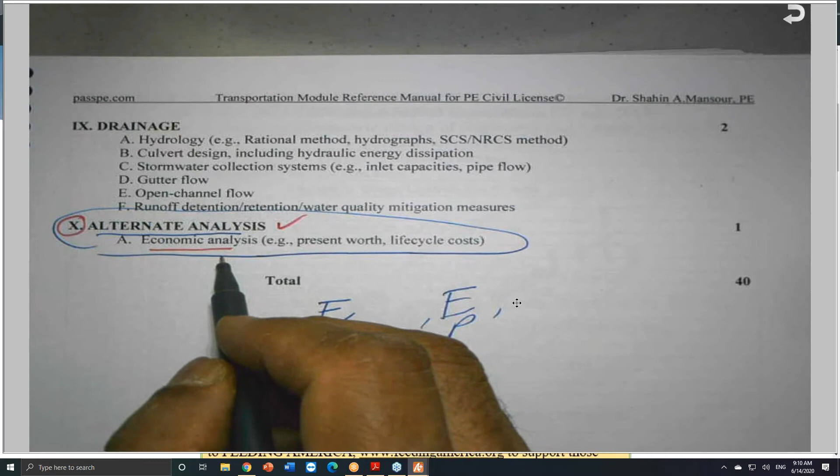One topic for the transportation PM that you will get on the actual exam is something related to alternative analysis. This is the last chapter of my textbook, which is in agreement with NCEES. The NCEES has 10 chapters for the transportation PM, and they put alternative analysis - let me double check, because sometimes I forget stuff. Yeah, alternative analysis, this is the last chapter, chapter 10, which they describe as the economic analysis, present worth, life cycle cost analysis, and so on. They give us some examples of alternative analysis.

This is basically chapter 10 of the NCEES, and it is also the same chapter number in my book.

I was looking for something, and I don't know if I sent this to you or not, but I will send it again. I found a bunch of problems - handwritten solutions like this. These are 20 problems.

I believe these come with solutions, and maybe in the future somebody will type it up for me if my staff comes back after this pandemic. I don't know - my staff is still working from home, but they are doing their best. So I will scan it.

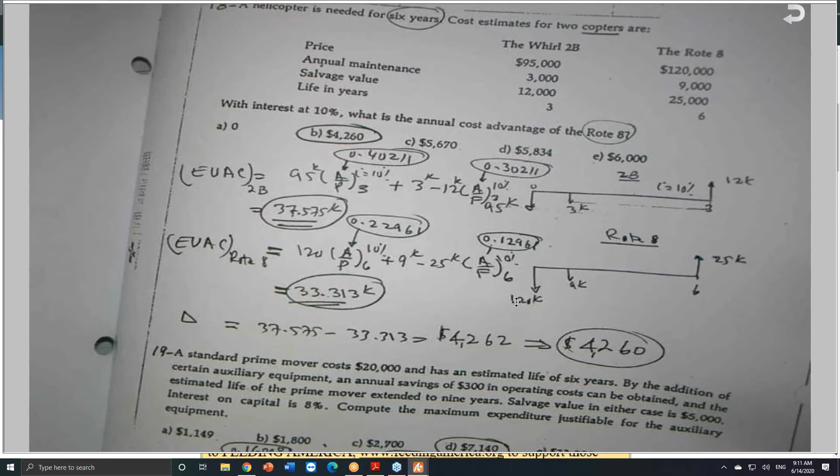I will send it to you also today with my notes. I believe that if you are able to finish all 20 problems and understand them very well, you will not have any problem, because one problem really could be the matter of passing versus not passing. So don't say 'it's just only one problem' - yes, it can matter, especially if it's a straightforward, easy problem. Why should I miss a problem that I can guarantee?

Because there are some problems you will see on the exam, especially in the afternoon, that are difficult, and you won't necessarily be able to finish all 40 problems in the afternoon and get all of them correct. But we should shoot for that. The problems that we can guarantee for sure, we will make our first priority.

You should make it the first priority as part of your strategy when you go to the exam. I always say that you should go with a well-known strategy - try to solve the easy problems first.

So I will scan this and send it to you, and I'll probably go over some of these problems today. I know you don't have it, or if I sent it before, probably you have it. If you have it, that's good - for those attending for the first time, every week I have new engineers attending, because I made this free during summer to keep everybody busy. So I will do my best.

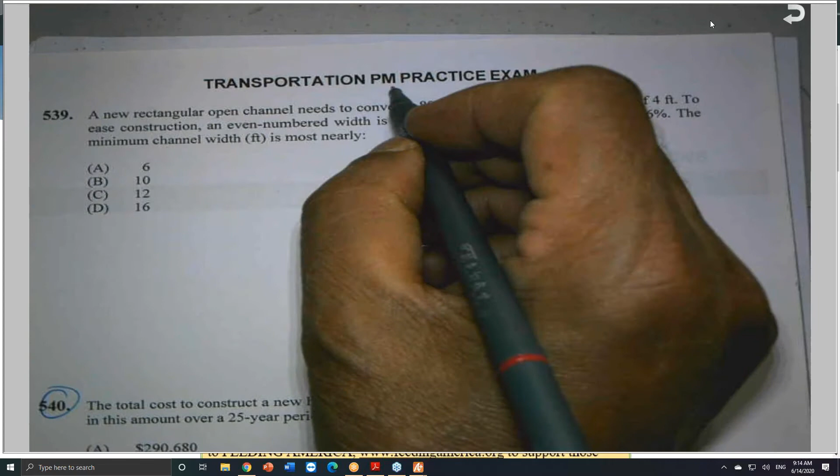This is from the Transportation PM, the blue book. If you have the blue book with you, that's fine, but always challenge yourself. If you look to this problem here, this is chapter 9, drainage, chapter 9 of the NCEES, which is also my book, drainage and pavement.

So they are saying that a new rectangular open channel needs to convey 1800 CFS without exceeding a depth of 4 feet to ease construction. An even numbered width is desired. Assume N is given, S is given, and the minimum channel width is most nearly. And this is what's asking for.

The moment I see lowercase n in the problem, I say, oh, this is Manning, okay, coefficient, or Manning constant coefficient. Immediately, because there are many equations in hydraulics and hydrology, the moment I see N in the problem, that means that is directing me to the proper equation.

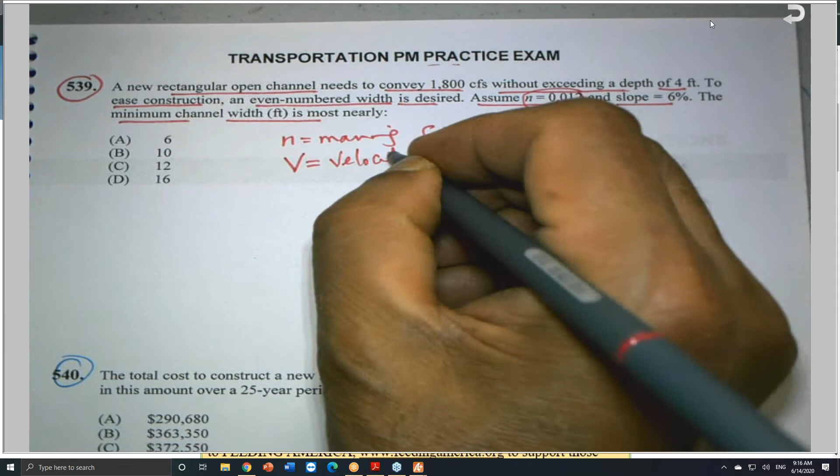And Manning equation, it says V for velocity, by the way, not volume, velocity, is given by 1.486 divided by N, hydraulic radius to the 2/3, square root of S. How do I remember this equation? Probably I solve a bunch of problems, and I still remember the equation by practicing.

And this is the same thing with you. Yes, I know you have textbooks with you during the exam, and I know you have many of them, but we don't like to spend too much time on something that I can handle with ease, especially the easy problems and the straightforward problems. Let me put it that way.

So, for example, I'm double checking to see if I really did write this equation right or wrong, and probably you will say, oh yeah, you remember that. So it is 1.486 over n, RH to the 2/3, square root of s. Bingo. And we know Q is equal to V times A. I should remember all this.

So S is given, which is the slope, and the Q is given. How many CFS? And the depth is limited to 4 feet. And he told me this is a rectangular channel. So I will have a rectangular channel like this.

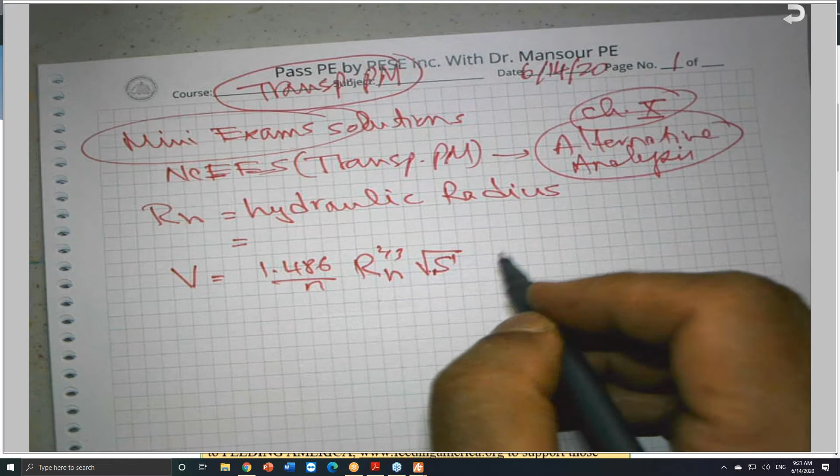What are the units for hydraulic radius before I proceed, by the way? Units are very important, especially for empirical formulas, because this equation Professor Manning came up with, 1.486 over N, RH to the 2/3, square root of S, is called an empirical formula. Empirical formula means an equation that has been developed by these professors, like Manning, or other scientists, after they did a lot of research, testing and formulation, and they came up with an equation that fits. It's not mathematical formulation, not a second order linear differential equation, for example. I can derive a second order linear differential equation for you, or whatever the equation is. So it's not an empirical formula in that sense.

And there are a lot of formulas, and I will mention one after I finish this. I talked about it yesterday, and I double checked it because I wrote it and I had doubts. So I went home and I checked it, and I found that. So the hydraulic radius is a parameter of this equation. It has units.

It is either feet or meter, centimeter or inches. We need to be familiar also with the SI because the exam is given in the US and the SI, so the two.

So by definition, the hydraulic radius is what? All of you remember that, I'm sure. It is the cross-sectional area of the flow, so it is the flow cross-sectional area divided by the wetted perimeter.

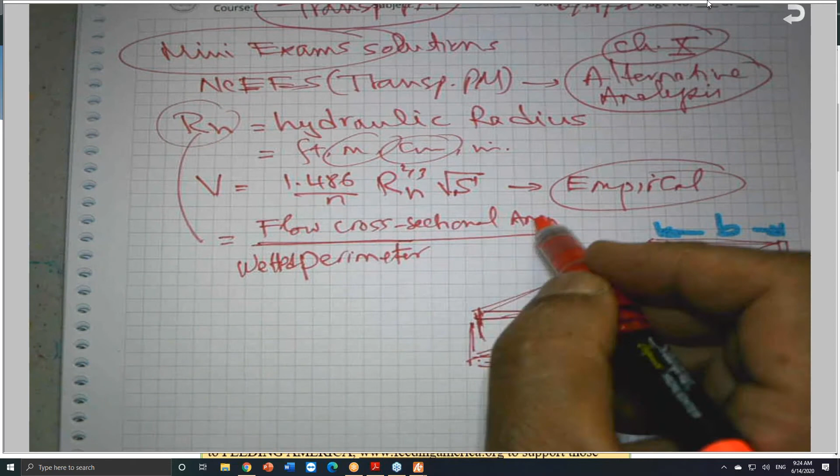So theoretically speaking, based on this definition, the cross-sectional area is very easy, which is B times 4, as we put it here in the equation. But what is the wetted perimeter? The wetted perimeter is this one here: this, plus this, plus this. The contact surface between the flow and the channel.

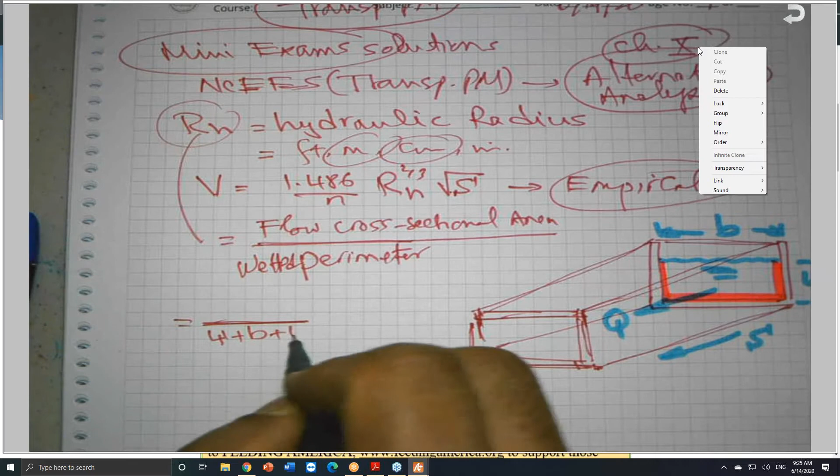So right now, the wetted perimeter is basically 4 feet plus B plus another 4 feet. So 4 feet plus B, which is unknown, plus 4 feet. And the cross-sectional area of the flow, not the cross-sectional area of the pipe or the channel—be careful, this is the flow cross-sectional area.

So in this case, it is B times 4. So this is 4B over 8 plus B, and this is the RH.

So if I plug it into the equation right now, let me write it here since I'm going to scan this and send it to you today. So the Q, which is given to be 1800 CFS, is equal to 1.486 divided by N, which is given to be 0.012, times RH raised to the 2/3, so it is 4B over 8 plus B, raised to the 2/3, times the square root of S.

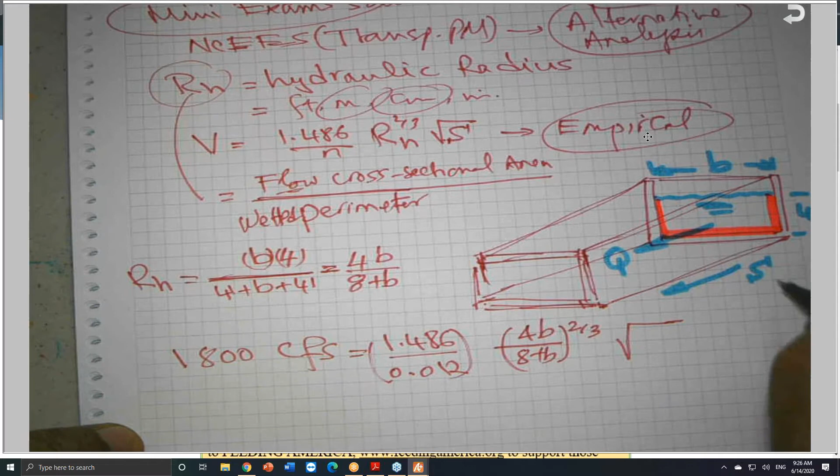S is given to be what? The S is given to be 6%, by the way. S is given—sometimes they give you S as a percentage, or the drop, how many feet per linear foot based on elevation. So this 6 is written like this, sometimes they give it to you like this. This means the same thing. So it gives the percentage, or in this case it's 0.06, it should be written this way, which is 6 over 100.

And finally multiplied by the area. So all this, by the way, from here to here, so far this is the V, but I need also multiplied by the area, the cross-sectional area of the flow again, which is 4 times B.

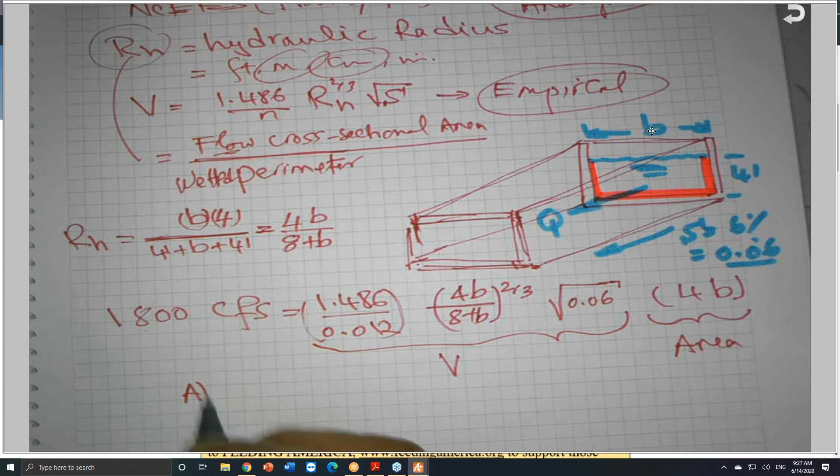So here you will find that B is here and B is here and B is here, and here it is. So, and you are given 4 answers, A, B, C, and D.

So in this case, I can simplify a lot of things here. I can do this and the square root of this, but I have B in the numerator, B here in the denominator, and B multiplied here. I can get the B here, by the way, or in a situation like this it's much easier. You can mathematically solve it, but I need to remember what is known as back substitution.

Since already I have 4 answers, instead of dealing with the exponents and all these things, I can say try—normally, but whatever you prefer to start with. Normally, I start either with B or C. You can start with C, and if you need to go smaller or larger. If you start with B, you need to decide to go smaller or larger. Again, whatever—instead of dealing with a lot of exponents and all these things.

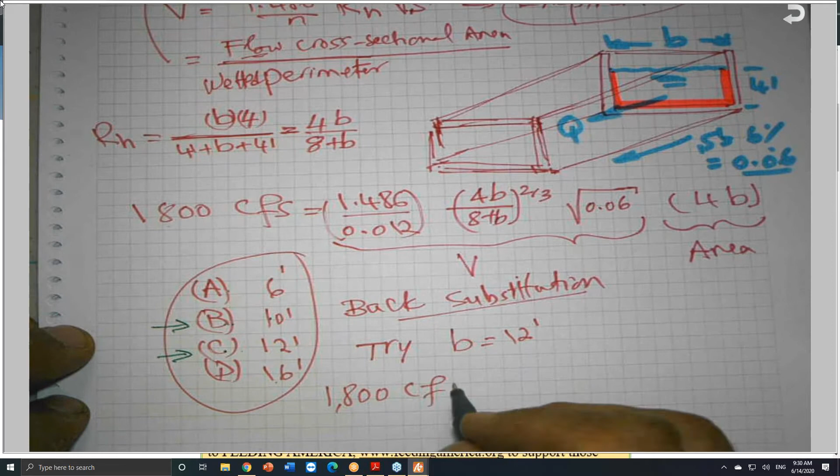Theoretically speaking, this is supposed to be this side here. So if you plug B equal to 12, 12 and 12, you will get a number.

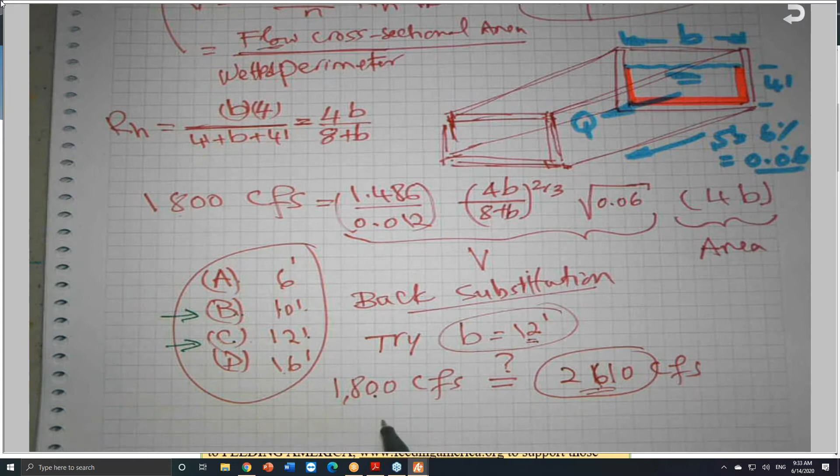This is my calculation, I hope you agree with me. That means the 12 I selected is not the correct one, because this number is greater than this. So I will say, try B equal 10. If I have time, I will do it, and the calculation to get an answer to this question. Is it 1800 CFS? Is it really close to this number, whatever it is? Because I tried 12, and 12 is too wide, it gives a larger Q than what is required.

So in this case, if I have time, I will try 10. If I don't have time, and I already tried 12, and 12 is too big but the difference is not huge, I believe 10 should work immediately. But for the sake of discussion, since we have time, as I told you, if you have time, do it. If you don't have time and you tried one number, the second number should work easily.

So in this case, let's go to this number here, I will try 10 right now. 18 enter, inverse, 4 times, 10 times, 4 times, 10 times, recall this number, multiply one more time. 18 enter, inverse, 4 times, 10 times. Probably most of you are faster than me because you are younger than me, so you're supposed to be faster. 2084 point something.

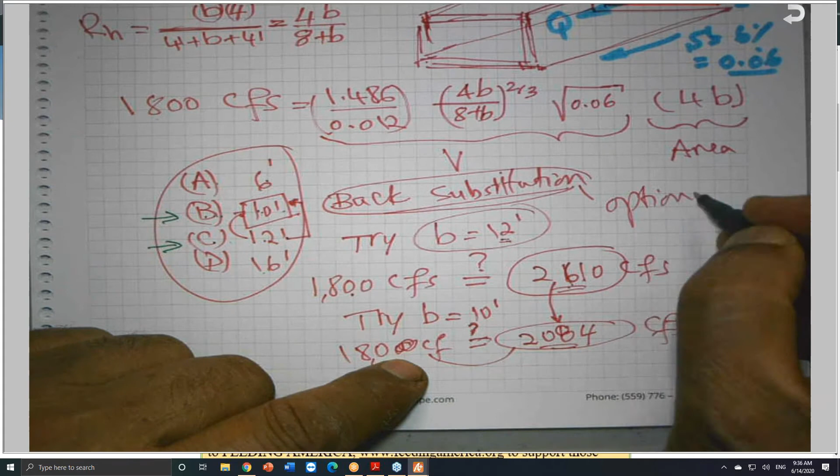If you started with B, this is one way, back substitution. I prefer you can make the equation, move this to the other side, and put a table. I have the table given in my book, the same thing. It doesn't matter which methodology you use, as long as we understand what we're looking for. But I consider back substitution is one of the options you should consider when solving for unknowns with exponents, like in our case here.

So this is something I needed to be aware of, and when you receive it, solve it again, and if you agree with me - I don't know the answer given in the NCEES, you can look at it - but I believe that 10 should be okay. The correct answer, which is 10 feet, is going to be the width that provides the minimum.

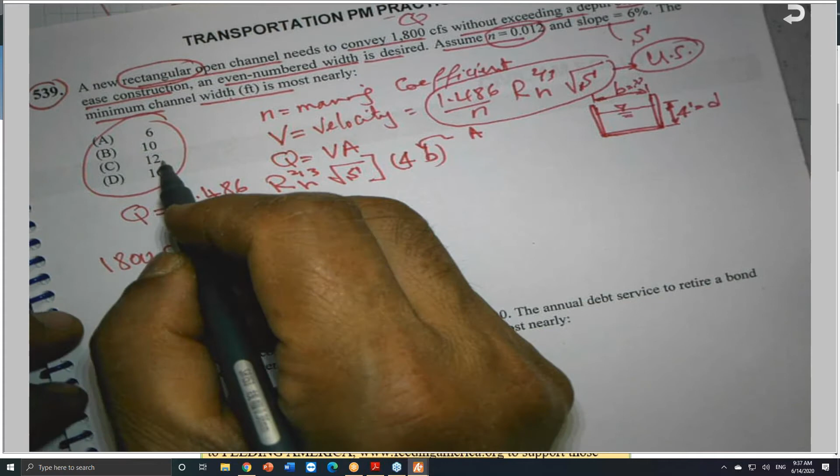By the way, do you think that 12 will work? Yes, 12 will work, 12 will carry more flow, by the way, and even the depth of flow will be less than 4 feet. But there is one key word here - so 12 will work, the one I started with, but he said the minimum.

The minimum. Be careful about that, by the way. Those are keywords on the exam: minimum, maximum, recommended.

So this is the way I will handle such a problem. If you have a better approach, please let me know and I will be glad to discuss it.

But there are some equations you need to know, related to Manning's formula. If you put the two equations side by side, this is the US and this is SI. The exam, to the best of my knowledge, can be given based on the NCEES, either in SI or US units.

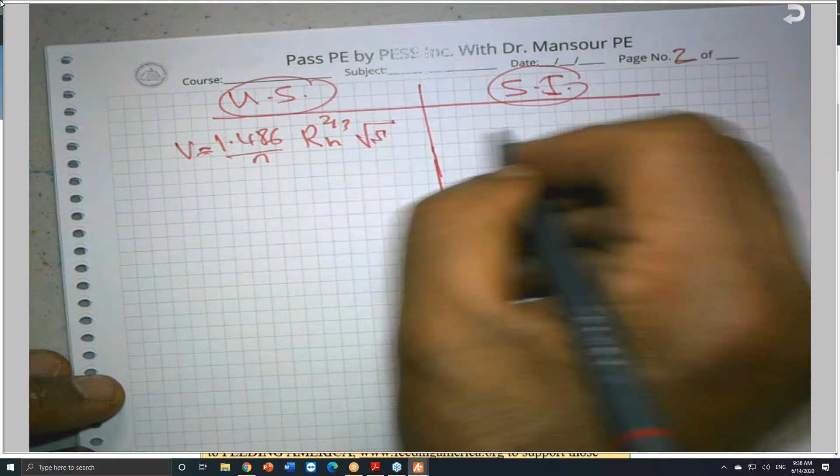V equals 1.486 over N, times the hydraulic radius RH to the 2/3 power, times the square root of S. The SI equation is V equals 1 over N, times RH to the 2/3, times the square root of S. The coefficient is different if we use SI. And again, Q equals V times A, the same equation, and we can proceed to solve the problem in SI units.

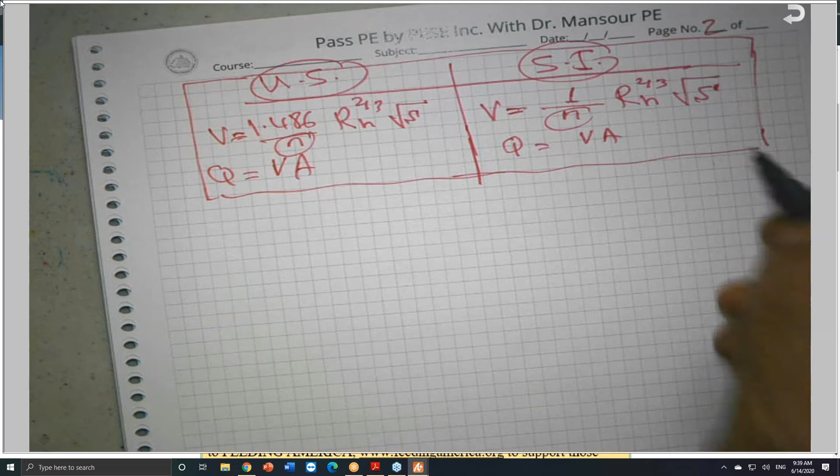These equations are empirical formulas. For the Manning's formula N value, normally they give it to you in the exam, because there are many tables available in the hydraulics books, and in order to avoid any variation of these constants, they give you the value of N to eliminate any discrepancy. So thank you very much.

Yes, some of you already solved it. Thank you very much. I don't know how the NCEES handles it - you look at it, maybe they set it up as an equation and solve the problem that way.

But I will write the equation and stop here, and use the test technique - solve it both ways. If you have other approaches from the NCEES or other books, let's look at what works. I consider back substitution one of the options I recommend you consider seriously on the exam, because it is much easier from my point of view. But again, you are the one who makes this determination - if you prefer a certain method versus another, you are very welcome to use what is appropriate for you, because our ultimate goal is to pass the exam.

What method do you prefer - empirical formulas? The professor Manning came up with this equation.

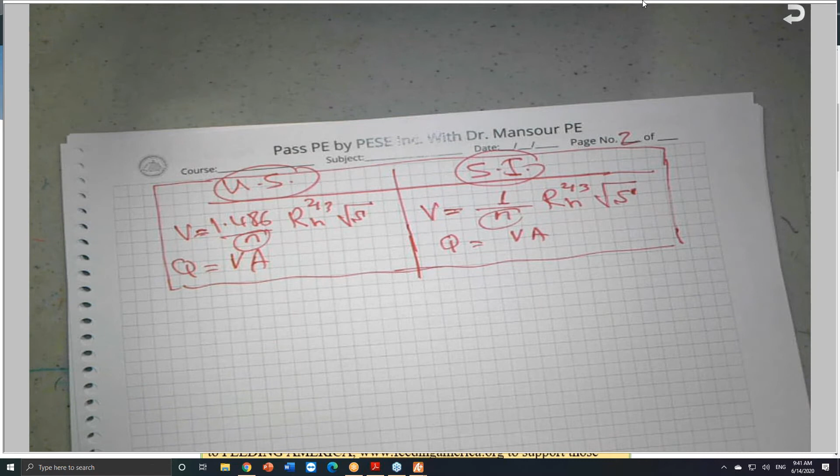Let me write it down - keywords, like minimum, maximum, recommended, preferred. All these keywords - I will pay attention to any of these that might be included in the question itself.

One empirical formula I was talking about yesterday in the afternoon - that's correct - it was about the two-thirds, that we were solving a problem.

We do have the bank cubic yard, the loose cubic yard, and the compacted cubic yard, and this diagram or figure - I drew it more than once, and I'm sure you memorize it by heart right now because I drew it about 15 or 20 times. I'm not counting, but...

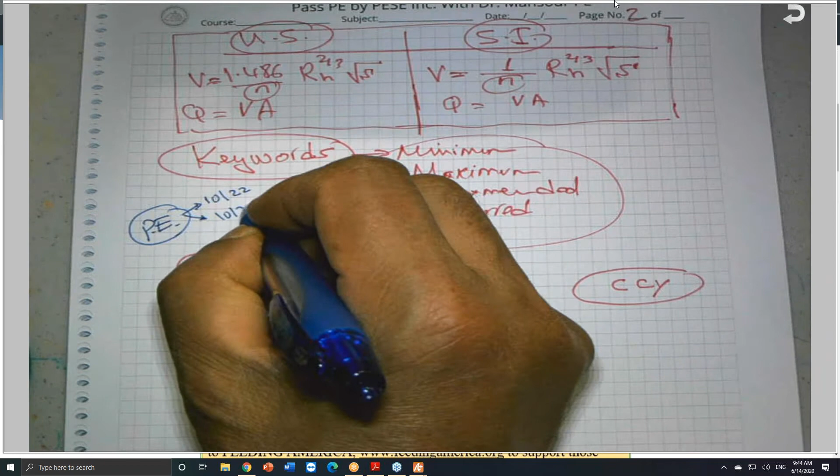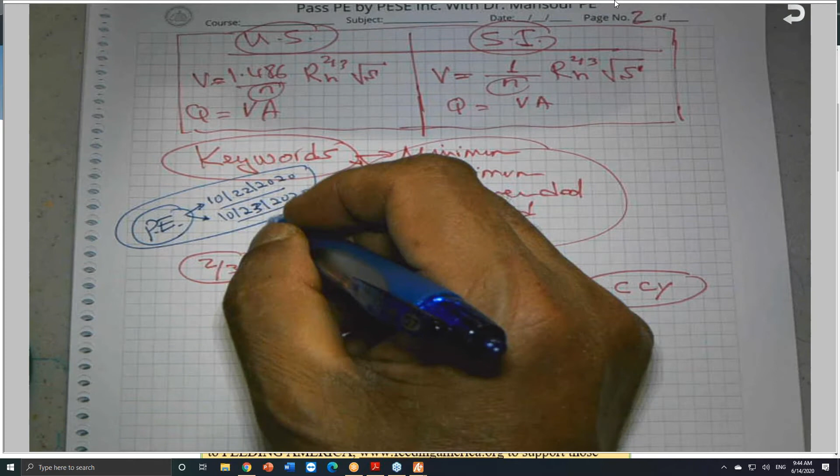What I need from you now, for the October 22 and October 23rd exam, I hope it will be given—no second wave, according to them. I don't know, there is a second wave according to professors or scientists or experts. I don't know what the situation will be on the 22nd and 23rd. I hope the sites will be available and we haven't hit the second wave yet, and everybody is safe to go to the exam site, unless something changes between now and October. But let's hope we make this exam, the national exam, the NCEES, the last one—do it and forget it.

I know some of you were upset because you were ready for the April exam and it was canceled. That's fine, no problem, the sky will not fall on the ground. Just consider it another opportunity to study more and prepare yourself well, so when you go to this exam, that's it—no more. Take it and forget it, and move to the next step. If in California you need seismic and surveying, or if you're in another state you already passed the national exam and have a PE. I wish the best to all of you.

So the two-thirds was mentioned yesterday, and we said that from here to here is the swell percent, swell factor, which equals 1 plus swell percent. As I mentioned before, the swell percent must be given, and the swell factor is greater than 1.

And the second relationship, from here to here, is the shrinkage factor, which is 1 minus shrinkage percent. The shrinkage factor is less than 1 for most soils like silt, clay, sand, and mixtures of these, but it is greater than 1 with rocks—rocks will never shrink after we disturb them by blasting or whatever method.

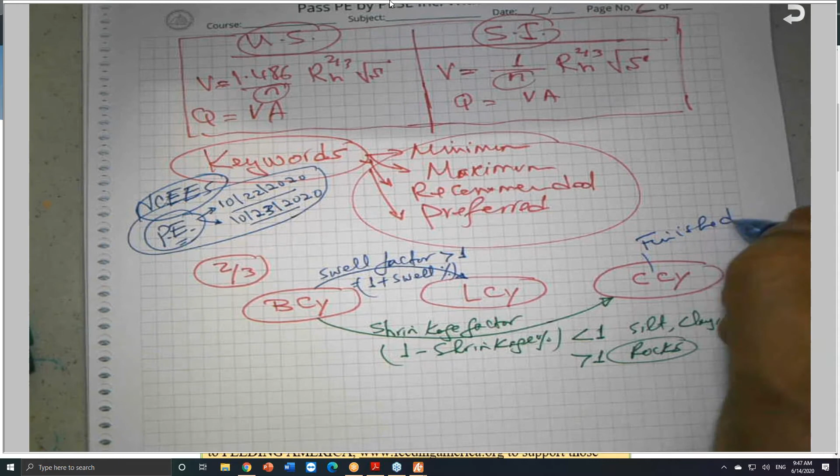So yesterday we were solving a problem. We have the volume here in compacted cubic yards, which, by the way, is a finished product—when you design a facility, either a highway, a street, or even a simple parking area, residential or commercial, and you need some kind of fill. So if this is the OG, the original ground, whatever fill you put here, or embankment as we call it—embankment or fill, both acceptable—this is a compacted cubic yard, a finished product, because as a designer you have a profile grade here. So this volume is the final volume, after they put it in layers and compact it.

So we were talking about the 2/3 yesterday. We got a number here and need to estimate the number here. If we take about 2/3 of this number, it gives us this number, and from this we can get the number of trucks. Those of you who attended yesterday, I believe I covered this in construction, and if I'm not mistaken I sent you my notes yesterday, so you should have it.

So the 2/3, and the second equation or scenario, is the 28-day compressive strength F sub C prime, which is P over A, supposed to be after 28 days. But we test the concrete at 7 days, called S7. So S28 equals S7 plus 2.5 times the square root of S7. This is the equation I wrote yesterday, showing how to estimate the 28-day strength from the 7-day strength. But you have to be careful—these must be in MPa, megapascal, and the result will also come in MPa. And 1 megapascal equals 145 psi.

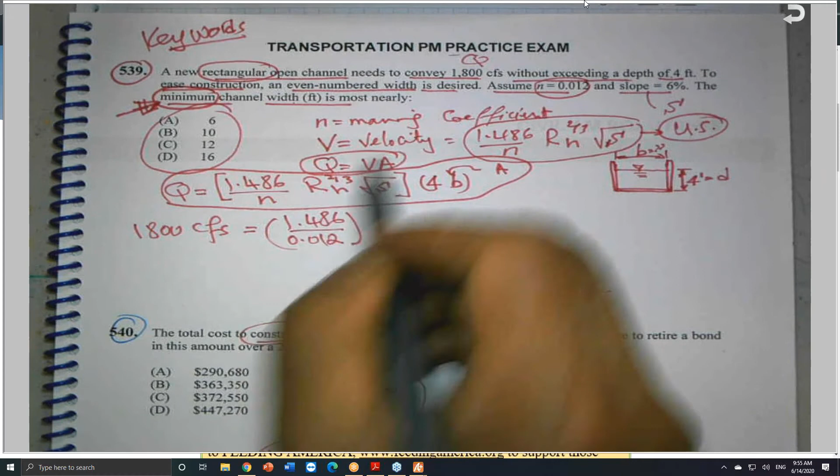Nobody will ask you to memorize equations, but by practicing you will be able to memorize some of these equations. As I told you, Q equals V times A, V equals... the same story here - we have a bunch of equations. They are available in any engineering economics book or any review book or prep book.

And we have the interest tables. So the I and the N are given either in equations or tables - interest tables. And there are books of interest tables. I provided as much as I can, most of the common interest rates with the common compounding period, N, whatever. But we should know what we are looking for.

If we are able to translate this into English, and the translation into English is called a cash flow diagram, CFD - this is the abbreviation of cash flow diagram. If I can translate this into a cash flow diagram, this is going to help me a lot. And I always encourage everybody to draw a cash flow diagram, a sketch, or illustration, or whatever you call it.

Any disbursement or out of your bucket at time 0, we call it present worth, which is P. Anything beyond that is called F, or A. It depends. If I have something annual that will occur every year, we call it A, annual or annuity, or sometimes equivalent uniform annual cost, which is A.

If we have anything available for us at the end, where N is the end of the life of the asset or the end of the compounding periods, anything left could be a future value, F. And F at N could be positive, going into your bucket, or it could be negative, out of your bucket. Normally, this is SN.

What is SN? This is the abbreviation for salvage value, or sometimes called residual value, which is the value of the asset at the end of its life. I bought a car, or a piece of construction equipment, and used it for 5-10 years, and I sold it. The price I get at the end of its life is called salvage value or residual value. It can sometimes be positive, sometimes negative.

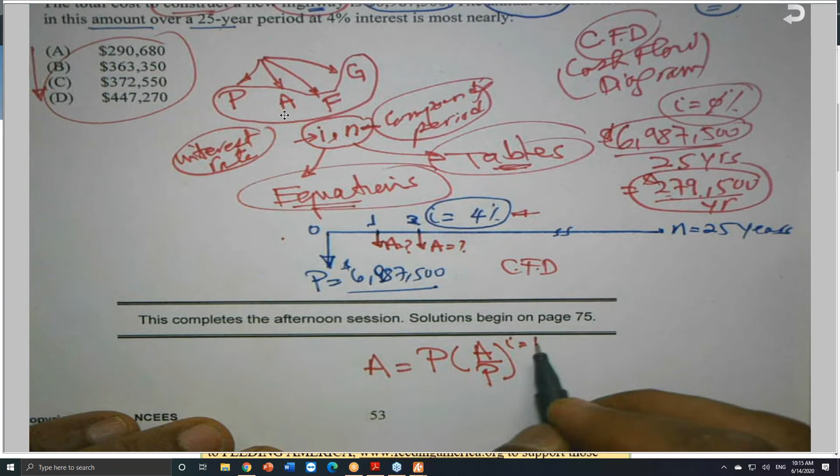So I'm saying that I'm looking for A. So A, which is the annual debt, is equal to P, which is the present amount, times A over P for the interest rate of 4%, and N is equal to 25. This is the setup of the equation.

How do I know it is A over P, not P over A? This is A over P or P over A, because both of them are available in the interest table, as I'm going to show you shortly. Always imagine that you are canceling out. I'm looking for this, so P, A over P - imagine that you are canceling this with this. What is left is A, which is the one I'm looking for. This is the way I double check when you are in a rush during the exam - you may call it P over A and you will get something, and they might have an answer to match that. But normally I look at this as, if I'm not canceling, this is a factor that I'm going to get.

If you don't like to use the interest table factors, in this case, you must have some kind of a table or a chart or a page. It does have the equations, and they are available everywhere, and normally we use these equations. Let me bring it to you. Here it is.

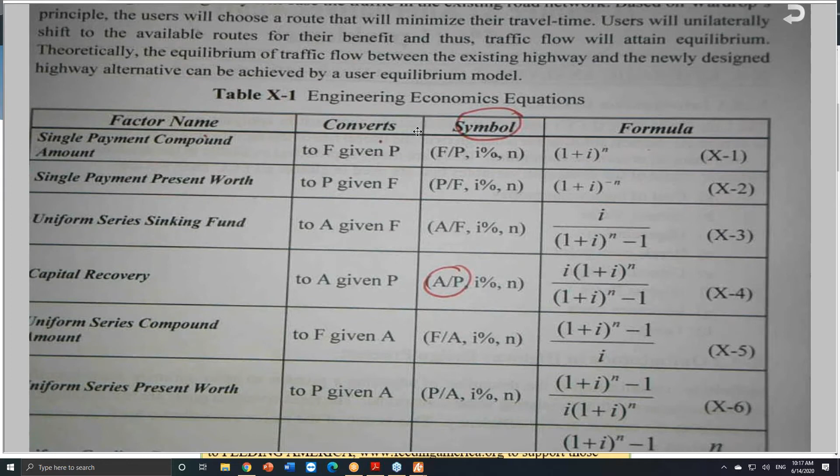This is an example of a table available, and I'm sure that you have it - the name, what it converts, the symbol and the formula. So those are the symbols that we are using. For example, A over P - here it is. A over P. And we have P over A also. This is called the capital recovery factor. P over A is the uniform series present worth factor. A gradient also - all these things are given, so the equations are given.

The equations are given, and also at the same time, the interest tables are available.

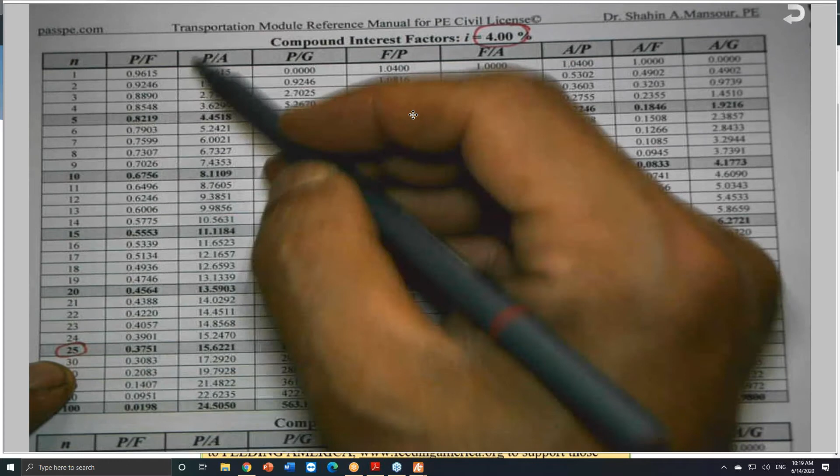So I will go to the capital recovery factor. I will go to the interest table that has 4% - like this table here, for example, I have a series of tables. I put them in this form, rows and columns, may be much easier to use. So I have 4%, and I have N of 25. Here it is, 25. And I'm looking for A over P - this is P over A, but I'm looking for A over P. So I get a factor of 0.0640. So it is the 6,987,500 times the factor that I got from the table, which is 0.0640.

Let me get my camera here close so you can see it. So in this case, if you multiply this times this, hopefully we are getting an answer to match. So I got 447,200. Is this correct? Let me make sure that 6,987,500 - normally I do my calculation twice. I got something okay in this.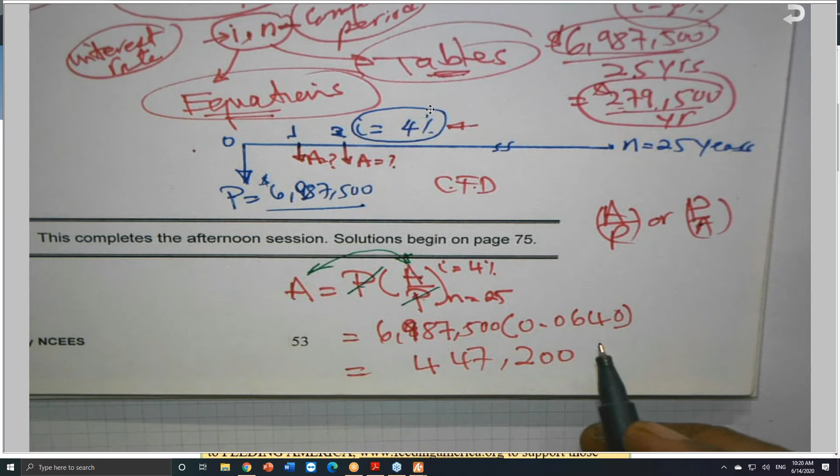It depends how many decimal places you are carrying. This is a factor here. So it is 6,987,500. Enter 0.0640 times, one more time. So this is what I got. So if we have 4 answers, probably the answer D is the closest one.

Which is by far, by the way, if you compare this number D, the answer D, the 447,000, compare - do you remember the interest-free loan that Mr. Mansour will give you? No? Okay, you see the difference between them? This is the interest-free, which is zero interest. You take the debt divided by the number of years versus the interest that compounded annually.

And normally this interest here, by the way, because we have something called I sub E, I doubt that he will ask you effective interest rate. If the interest, they call it I here, there is another I called I sub E, or we call it effective interest rate. Effective interest rate.

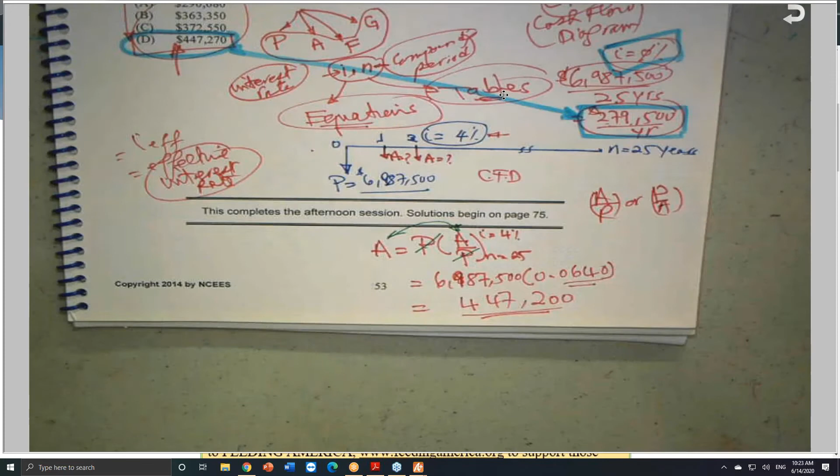When you have n, the compounding period doesn't match any of these values here, and it did happen in the past, by the way. If he gave you an interest rate that whatever book or books you have, for example, I have 4-6% all the way until 20 or 18%, I remember. 18%? Oh yeah, 18%. 18%.

And this is 12, and I jump to 18. Unless if you have one of these books that has interest tables only, and they are available in the market, I don't expect that you need to carry this with you. I do have a series of tables, by the way. Somebody generated them for me 2 years ago, but I didn't get a chance to check it. They have a very wide range of interest rate, and also that number - so if the interest rate is not among the values given in any table that you have, or the n, the number of compounding - here it goes from 1 all the way until 25. And after that, jump to 30, 40, 50, 60, 100.

So if the compounding periods are not matching whatever you have here, in this case, obviously, this linear interpolation - sometimes we do it, and you should master what linear interpolation is, how to use it, and I will be glad to talk about how to do linear interpolation by hand. If you have a programmable calculator and you know how to use linear interpolation, please do it. So the interest tables, most of the time, but I cannot guarantee that all the time the interest tables will be available. So please look to this problem, and if you'd like to solve it using other methods, please use the equations. You need to pick the right equation, and also it's very important to pick up the right equation, because the right equation is very, very important.

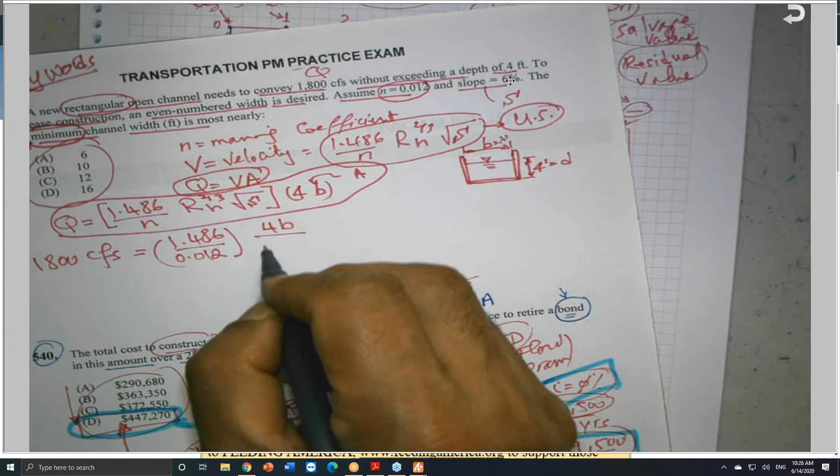But I should finish this problem here. I say that the RH is the area which is 4 times b over 8 plus b, 2/3 at least, you know exactly, and the square root of s is given to be 0.06, and the area is 4b. So this is 4b, b as in boy, here it is. So this is the equation that we are going to try, back substitution and so on.

Okay, so I scan it, and because I wrote something here, probably you need it. In addition to what there were notes.

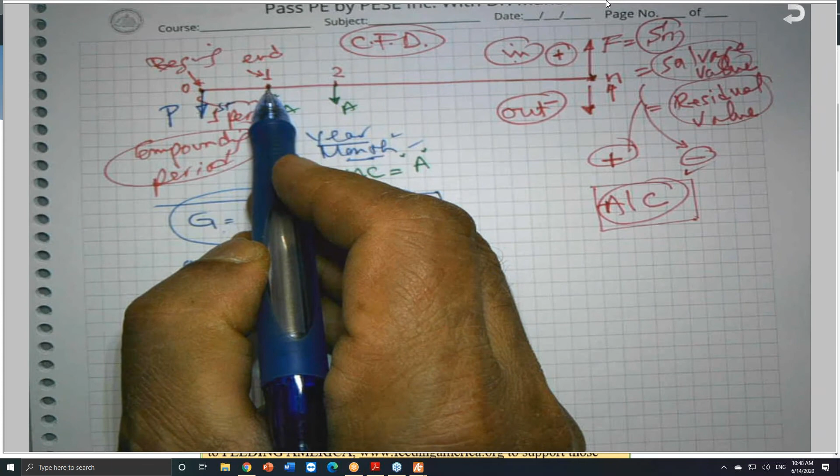We said that the way engineering economics equations and factors are given, and I will go to my notes so you can read it again when you receive it - at 0, at the beginning of the life of any asset or any economics operation, this is the beginning and this is the end. So this is the beginning of the first period. Here it is, one period - this is the first period, period number 1. It could be a month, a year, a day, or whatever it is. This is the beginning and this is the end. Do you agree with me? So any period has a beginning and an end.

For example, if this is 14 and this is 15 - what does it mean? This is the end of period number 14 and the beginning of period 15. Do you agree with me? This is the end of 15 and the beginning of 16, if we have a 16. This is called a period.

Like your PE has a beginning and has an end. You start studying for the PE, I don't know how many months ago, and the end is coming very soon. This October you will ace it, and this is the end of it. So everything has a beginning and has an end, okay?

So going back to the problem, let's translate it into English. $200 is deposited in a savings account at the beginning of each year for 15 years. So this is 0 and this is 1. This is the beginning of the first year, and this is the end of the first year. Where did I put the money? I put the money here.

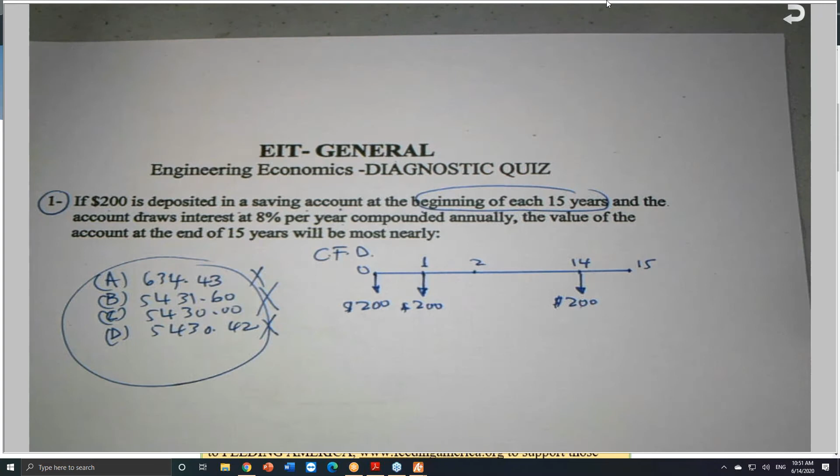If you count how many payments from here, from 0 to 14, you will find there are 15. Because this is at the beginning, here it is a key. As I told you, every problem has a keyword or words. If we miss the keyword, like maximum and minimum, beginning, end - if we miss the keyword, we are going to miss the problem, like this one here.

He's asking, what is the value of the amount at the end? So I need the money here. How much is the value of the money here, at interest rate I equal 8% per year, compounded annually? So I don't do anything to get the I effective. I doubt he will ask you to calculate the effective interest rate.

I do have some problems, the problem that you receive. So in this case, if you count them, how many payments did I make here? They are 15, agree with me or not? And the moment I put my money at the beginning of the first year, this money starts to earn interest, which is at 8%. But I need the money here, so I need the F, the future.

And again, the other keyword here, at the end. So two keywords: at the beginning and at the end. And the interest rate, I equal 8, and N equal 15. Why did I say F over A? Because this is A, and I'm looking for the future of the money to be accumulated.

If I stop here, this will give me the money here. But I need the money here. So I have to multiply this by another factor, which is F over P for 8% for N equal 1. And I know you will disagree with me, and I know that you will take it tonight and do it. It is $200.

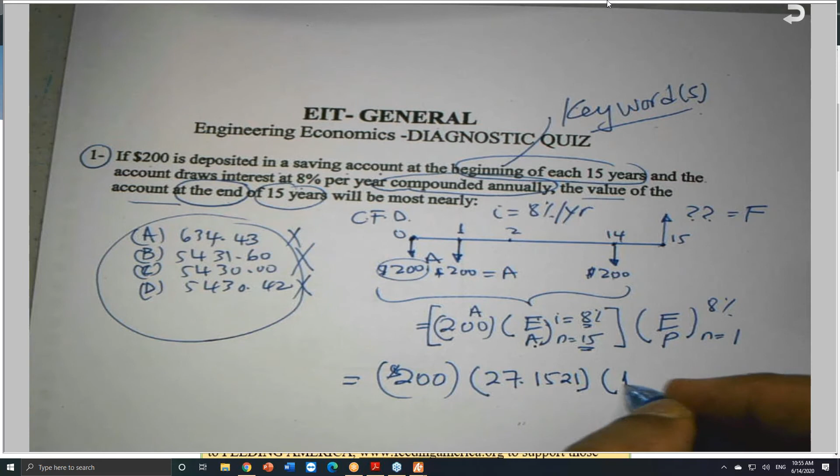If we go to the first factor, how much is this factor here? F over A for N equal 15. Anybody has interest tables, just to correct me if I'm wrong: 27.1521, and I have to multiply this to bring the money to the end of 15 years, which is another factor, 1.08, which is 1 plus I, by the way. If you do this, you will get $5,864.

Let me double check my math very quick. One more time. I did it. It's 200, enter, 27.1521 times 1.08 times... no, it's 64... sorry, 64, okay, 0.85. So it is $5,864.85.

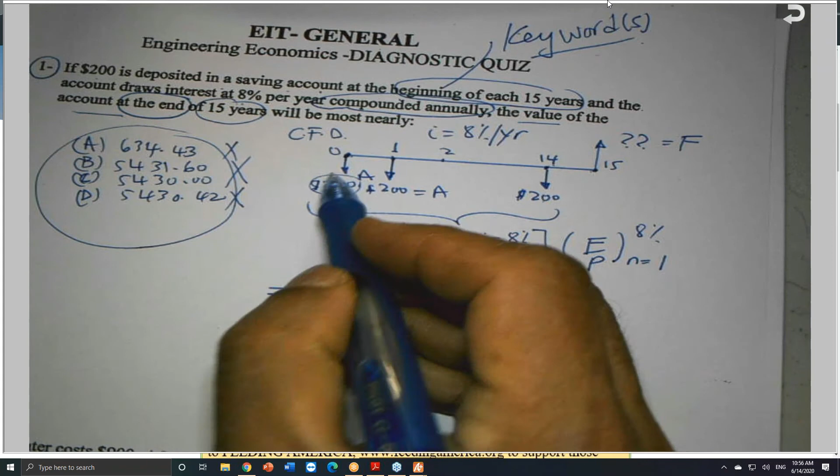I know you will say, oh wait a second - this is what I was referring to. I said that sometimes they can give you the payments to be made at the beginning of the compounding period, like this. I need to deposit the money at time 0, at the beginning of each, not at the end. And don't forget, you need to transfer the money from here to here. Look at it again, and I'm sure that next time when we meet, you will ask me. I used to give this as a quiz when I was teaching back in Las Cruces in New Mexico.

And some students, they stop here, because if you look at this, probably some of you did this. Maybe you ended it at 27.1521 entered 200 times, and this is what most of you probably said: 5,430.42. And this is not the right way.

Because the beginning of the period is -- this is why there are three answers here that match the first portion of it, but you forgot to bring it to the end of the 15th year. Look at it again, one more time. It does not hurt.

Okay, let us look at problem number 2. Let me give you another two minutes. Right now you are expert. Problem number 2. Three minutes from now, it is 10:58.

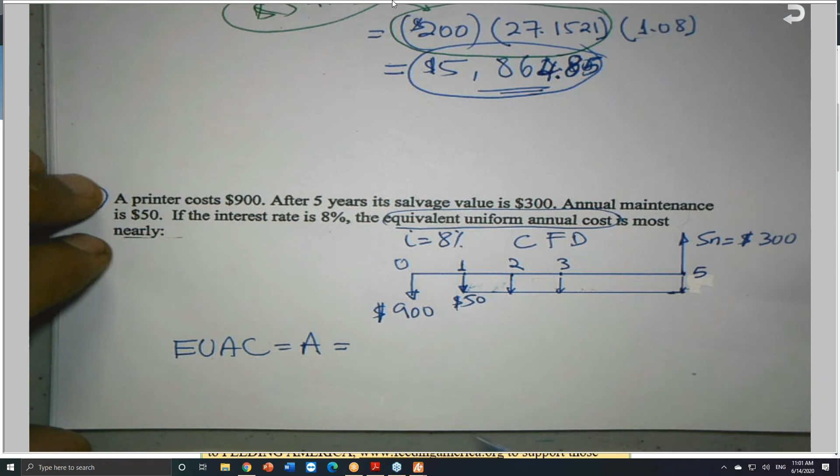Okay, so three minutes, it is 11:01. Let's collect some answers. Who is going to give me answer number 1? Let me make sure I will not mix the answers.

I got an answer. Can N be 16? No, no, no. Muhammad, no, the answer from the previous problem, no. So I got 270.343, 270.34, and I got another answer.

Forgive my eyes, 204. Is this 204? Yeah, 204. And I got an answer 270. Already I put 270. I got one answer that is a very high number, it is 1783.45.

This is different from that. And I got an answer 861. And I got an answer 224.3, 224.31, or 0.30 -- sorry, or 31. Okay.

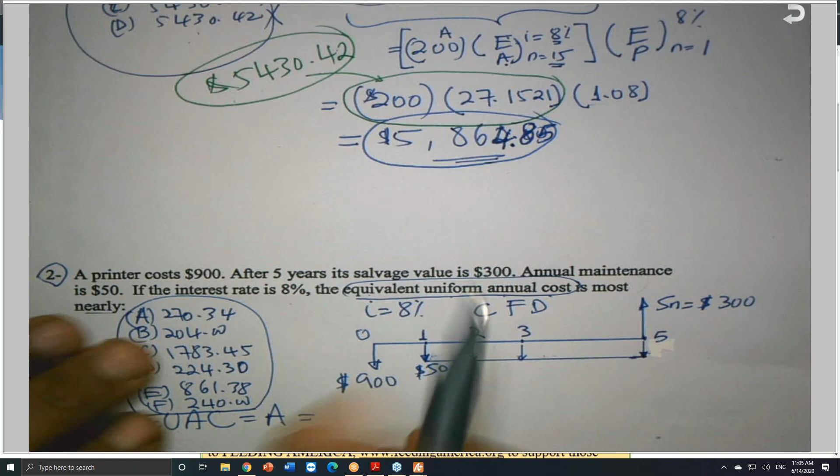Our friend, the one who's asking, can I make this N be 16? It will be a serious mistake. That means you made 16 payments, not 15 payments. Okay, this is the question to you, my friend. I told you that you cannot put n equal 16.

Because if you did that, you are telling me -- I need you to count how many payments did we make if we put a payment at the beginning of each year for 15 years? At the beginning -- this is the beginning of the 15th year, and this is the end of the 15th year. So this is the difference, my friend, between n equal 15 and n equal 16. No, you cannot put n equal 16 here.

So at the end of each year, we calculate the benefits and expenses, and what did we make, and so on, and how much money did we make. So for tax purposes, we need to do this. So this is a printer that costs

$900 -- that means I go and pay money right now. This is out of my pocket. This is out, and this is in. Do you remember? Receipts and disbursements. Disbursements. So I paid $900 to get this printer.

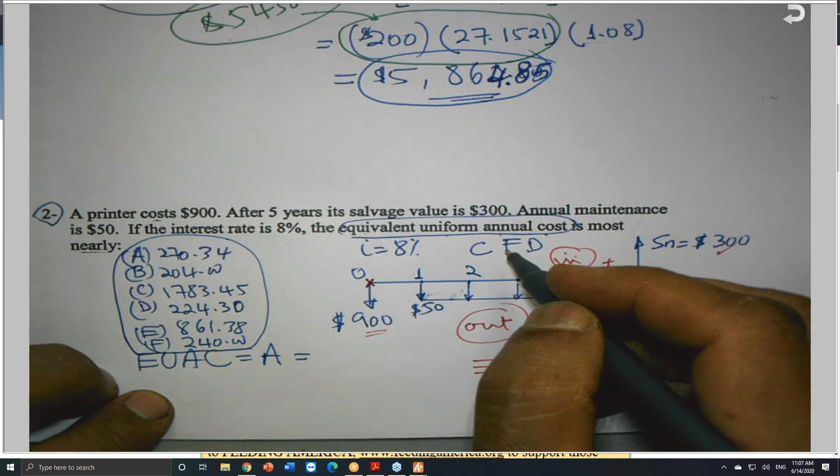After 5 years, I sold it -- so at the end of the 5th year, I sold it for $300. So this is money in, a plus. If the interest is such, what is the equivalent uniform annual cost? I'm saying how much this printer cost me over these 5 years. So I'm saying that this is like this. I'm trying to convert this cash flow diagram to this cash flow diagram. This is what is meant, and we need to understand that.

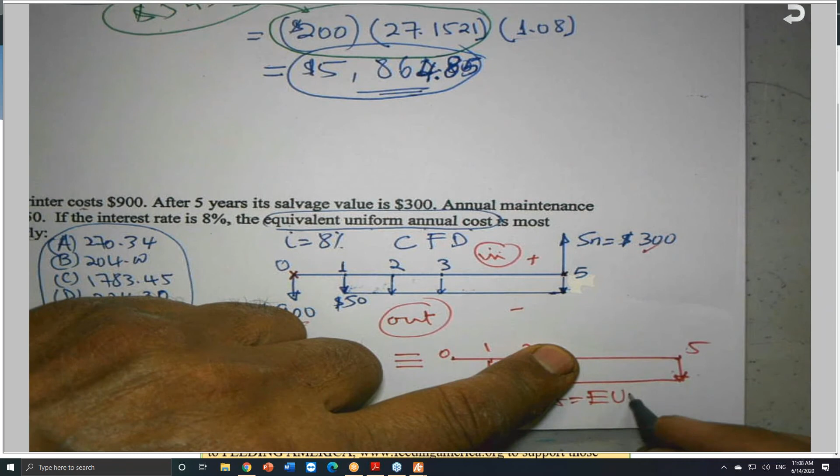It is 5, this from 0 to 5, 1, 2, all the way to the end. I'm saying how much each year it cost me, 1, 2, all the way until 5. That means I'm looking for the A. I need to convert this to make it equivalent uniform annual cost, EUAC, a term that we use a lot, and I need you to be aware of that.

Here it is, EUAC, equivalent uniform annual cost. So this, I'm looking for A, annuity. So the $900 at the beginning is considered as P, present worth, the value of the money at time 0, call it present.

P, or in some books they use PW, but P is the most common one. So I need to convert everything to make it an A. So the $900, which is the price of the printer, times A over P. Again, because this is P, imagine you cancel this over this, you end with A. The interest rate is given to be 8%, compounded annually.

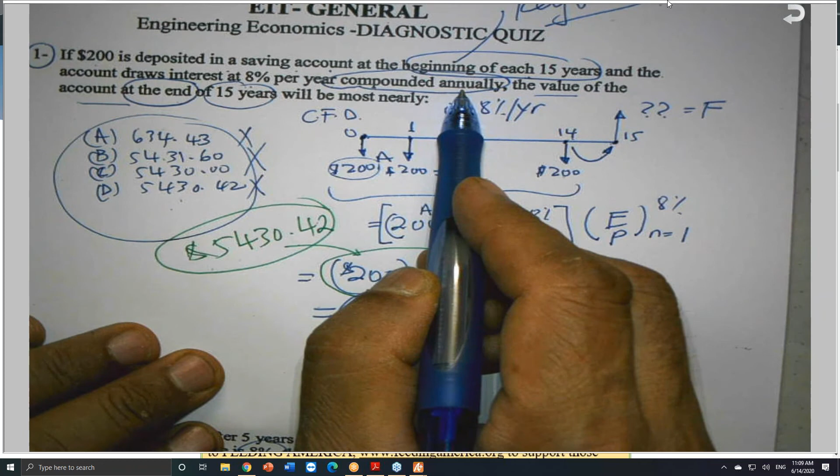If the interest rate was not stated, like in the previous problem, compounded annually - if he did not mention anything, by default it's compounded annually. Annually. Because if the compounding is different than annually, he should mention it. If he said the interest compounded monthly, different story.

I have to get the effective interest rate, which will be higher than 8%, by the way. It is 1 plus R over N to power N, but I doubt he will ask. It's available in my books, and we can talk about this later on. In the problems I'm going to send you, there are 1 or 2 problems related to that, just in case, because I need you to pass this.

This is it. This is it. So I always tell my students at the beginning of the semester - you heard this song before, but forgive me - that when I entered the class the first day for almost 30 years here at CSU Fresno or New Mexico State, I tell the students, shoot for an A from the beginning. Shoot for the moon.

Shoot for an A. This A can go down one day, you have a bad day or the exam was tough, and it can go to B or C, for example. But if you are shooting for B or C from the beginning of the semester, maybe it will go down to D or F. So shoot for the moon, and if you miss, you are going to land among the stars, as the saying goes. It doesn't matter how much the distance between the stars and the moon, but shoot for the moon, and if you miss, you land among the stars.

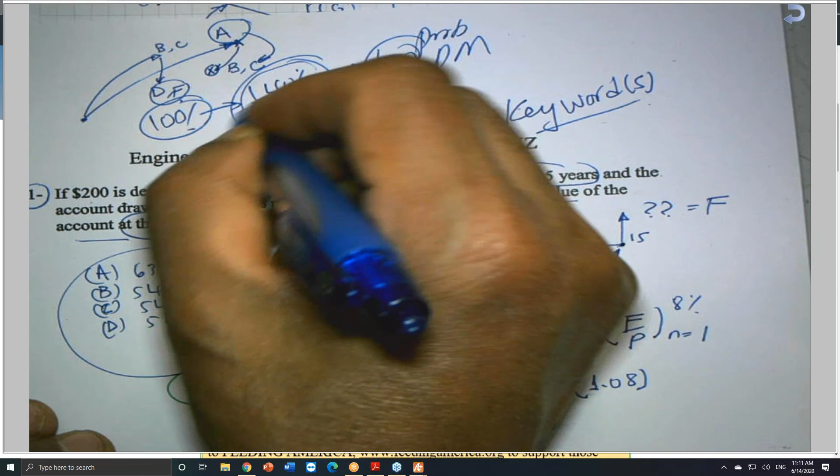So I am shooting to solve the 40 problems in the afternoon, to get all of them, to ace all of them. I doubt you will do that, but I should shoot for that. So normally shoot for the moon, and this is why I need you not to prepare yourself for 100%. No, I'm expecting you to prepare for 140% or 150%. I need you to shoot for the moon, because one of these problems may be difficult, something strange you never heard about. They come up with very strange problems and strange language. But if you are preparing yourself for 150 or 140, yes, it will go down maybe to 120 or 100 or 90. But if you are shooting for 100, that can go to 80 or 90 or 70 or 60. It depends really. So let us do our best.

Okay, sorry for mentioning that, but always okay. So this is 8, and n is equal to 5.

So I convert this P into A. This is already A, so plus $50. This is already annually, I have no choice but to keep it as is, because it's already annually. Multiplied by 1 if you want. But this is money coming into my pocket, so it is a minus. And this is $300.

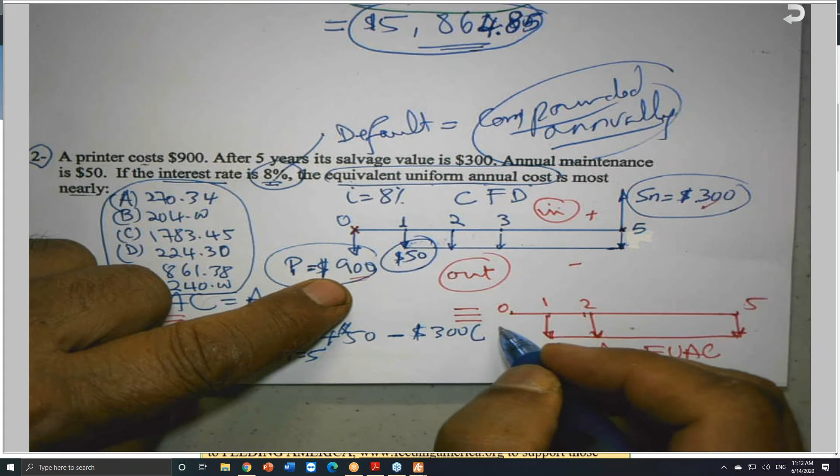This is an F with respect to this, so I need to spread it back to make it an annual. So I say it is A over F, because this is F, so F will cancel with F, at 8%, and N is equal to 5. If you do this calculation to get the appropriate factors, you will get in the neighborhood of $224.

If my math is correct, let me double check my calculation. I did it once, let me do it one more time. So A over P, it is 0.2505. Enter 900 times, plus 50, store this, and the 300, enter 0.1705 times minus... 224.30 as one answer. I believe it is 224.30. This answer here - answer D.

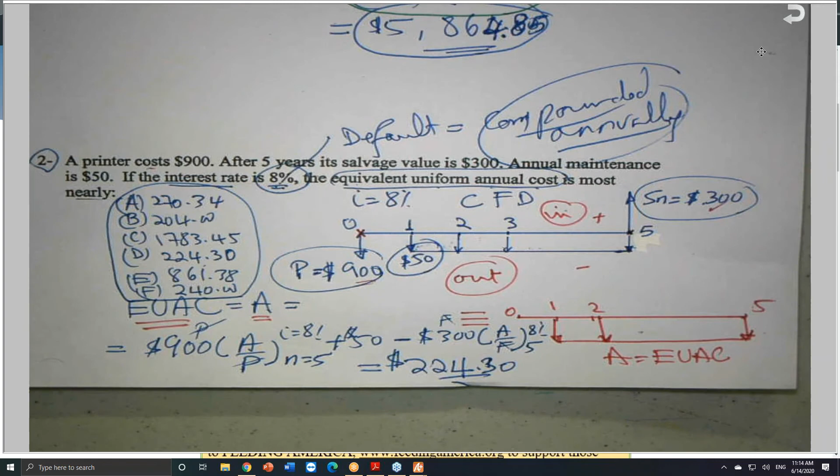So this is the answer here. Please look at these two problems when you receive them, go over them again, and I will be glad to go over them with you.

I will send this with my notes, which is my handwritten work and all the answers we got, plus a blank one so you can do it on your own one more time, just to make sure. When you receive the rest of the problems, please go over them and do your best, and I will do all my best.

The last thing I would like to discuss today, and I will send it also just in case you don't have my book, I need to talk about chapter number 7 of my book.

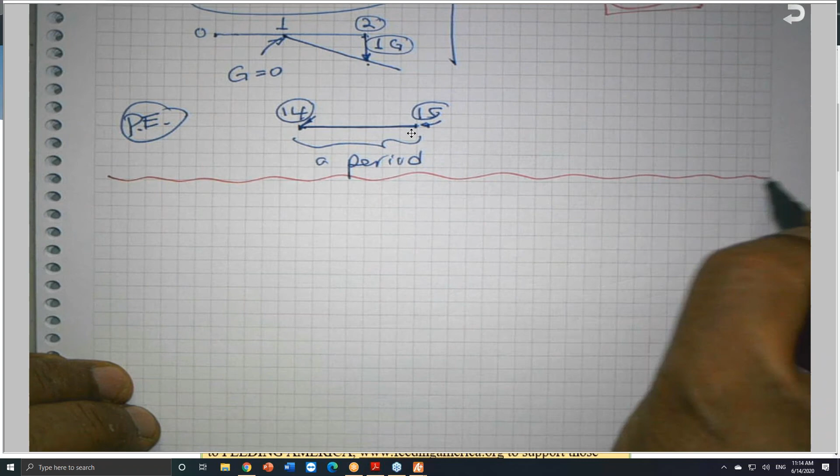And if you did not receive, for any reason, mini exam 5 or 4 - let me double check. No, I believe there are only four. The last one I was working on this morning, mini exam number 4. So I have mini exam 1, 2, 3, and 4.

So if you did not receive them for whatever reason, probably this is your first time joining, I will be glad to send all of you these 4 mini exams.

I hope I can come up with another one or two before we start the course again. So probably I can come up with mini exam number 5, and I'll try to go back because I stopped at problem number 14. I don't know why - normally I try to make mini exams 25 problems, so mini exam number 5 will be 25.

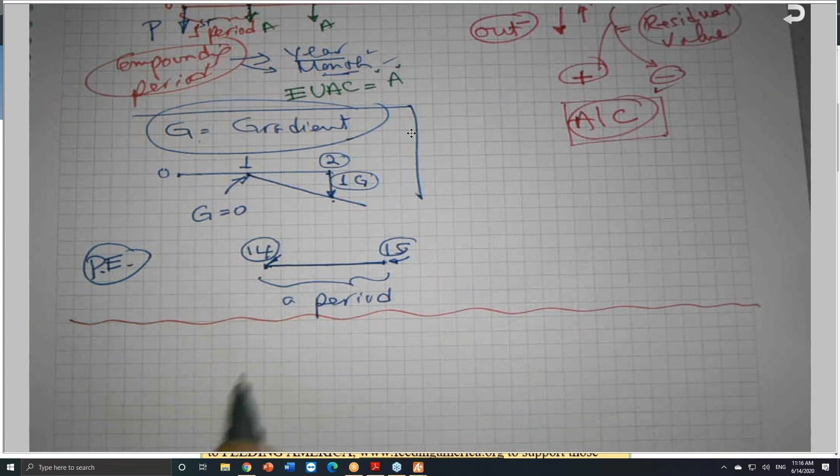I will do my best, and it will have some engineering economics problems and pavement design and pavement calculations - either HMA, hot mix asphalt, or PCC, which is rigid pavement. So we'll talk about pavement.

So this is mini exam number 5. I will send it to you at least when we meet again. You will get mini exam number 5, okay? And I hope by that time when we meet next time...

I will send you like this - I will work the problems. I remember we worked this problem together here, problem number 3, and I scanned it and sent it to you. It's a very good problem, horizontal curve.

Signal warrants - I still receive some questions from some of you. Mass diagram, we should master mass diagram because you might see a problem related to it. These things - engineering economics problems, mass diagrams, signal warrants - if you understand them you should get them, because there's no mystery about where the equations or tables are; this is straightforward.

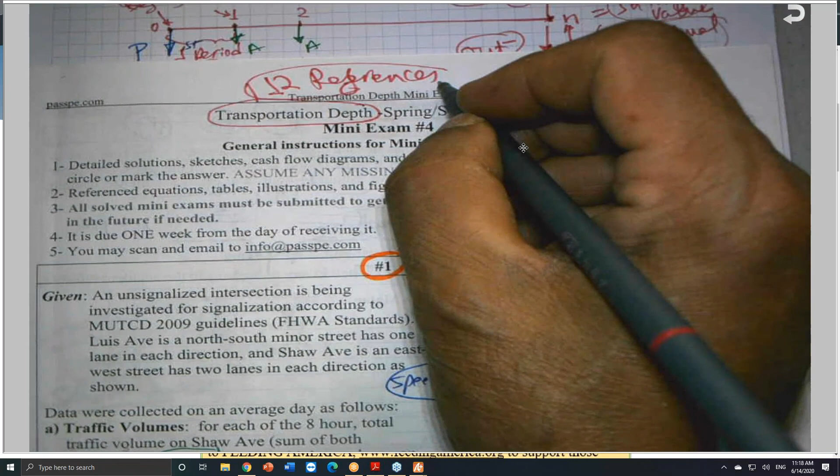So the question - there's no doubt - if I know what the signal warrants are, and I'm asked if it's signal warrant number 1 or number 4 or number 7, I know exactly where it is, and I know what the requirements are for signal warrant number 1. This has no doubt - I should solve it because I know exactly where it is located in the MUTCD, and no guess.

Okay, and the language should be straightforward. Horizontal, vertical, and there's another problem here, probably very close to one given in the NCEES. It could be the same, or sometimes I change it. In the mass diagrams, maybe, but it's just straightforward. You don't need to even open a book for a mass diagram problem, so you can ace it, and I believe they have one in the NCEES.

So this is a problem you can guarantee, and this is what I always say: you have to go to the exam with a very clear strategy. Pavement, as you know, has one chapter in the NCEES, and I believe I also have a chapter in my book under geotechnical and pavement. This is chapter 8.

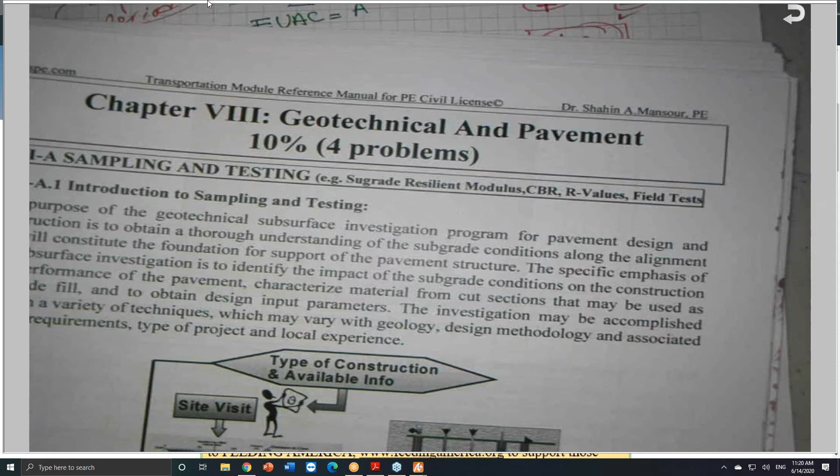It does have 4 problems. Chapter 8, geotechnical and pavement. Again, we need to master this, so I will include the section where I start talking about it.

As far as design goes, the design of flexible pavement and the design of rigid pavement. After this discussion, you will be able to design any pavement in your daily life if you're doing this. There are many programs available nowadays, but for the sake of the exam...

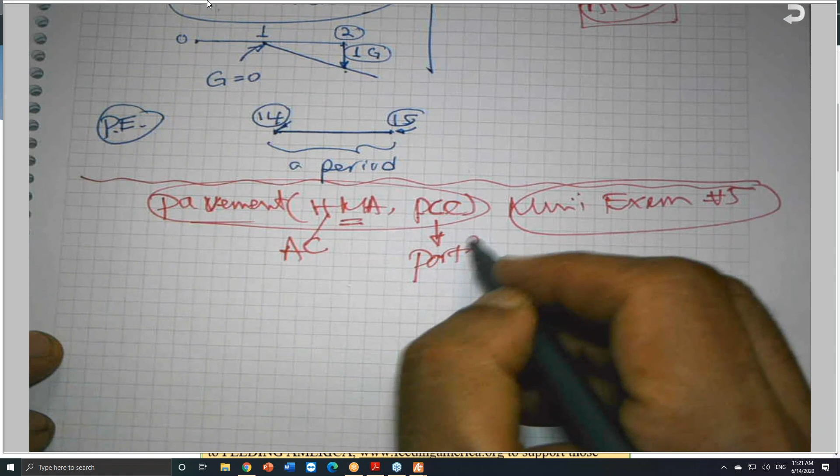So when we're talking about HMA, the hot mix asphalt, or simply we call it AC, asphalt, or PCC, which is Portland cement concrete. PCC, we use it, as you remember, for the compound curve, the point of compound curvature. But the PCC here is Portland cement concrete. And AC, the asphalt concrete, or HMA, which is hot mix asphalt.

I will also include in mini exam number 5 one problem about superpave. Sometimes they include superpave as part of the pavement section, and I will talk about superpave, what is meant by it, and all the letters they use, and so on.

So this is what I'm planning to do, and I will do my best to come up with 25 problems, not 25 years, no, 25 problems. Sorry, I'm trying to find 25 problems here. So this is what I'm planning to do.

So if you look at the design, when designing any pavement, either rigid or flexible pavement, we'll call it rigid and flexible. There's also something called semi-rigid, by the way. Remind me to find what semi-rigid pavement is.

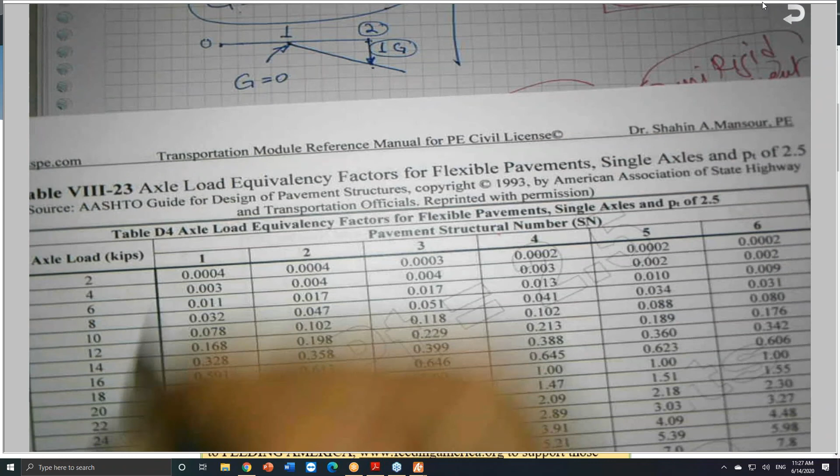So I get loads. For the pavement, we are dealing with ESALs, equivalent single axle load. AASHTO, starting in 1993, did a lot of research and came up with tables for us. These tables, they call it the LEF.

And this LEF is for flexible pavement and single axle, and for a P sub T equal to 2.5. So it is for P sub T of 2.5.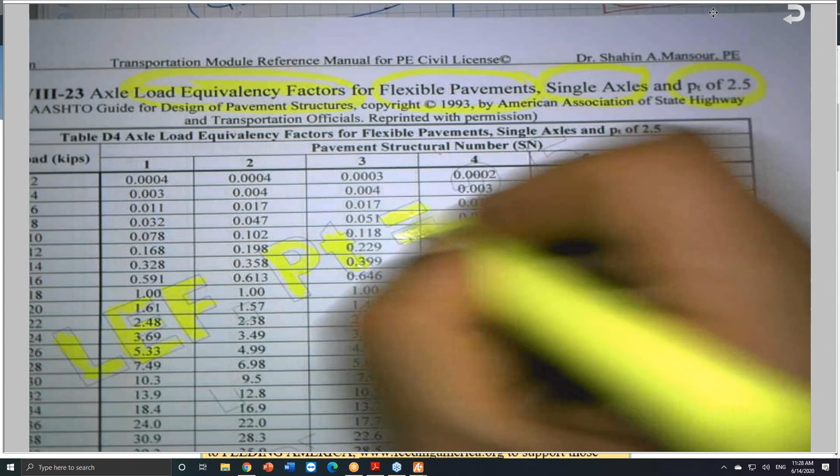How many tables do they have? This is an AASHTO table, by the way - not my table, not Mr. Mansour's table. It's the AASHTO guide for design of pavement structures, one of the 12 required references. In Appendix D, they have 18 tables.

Let me see if I can find it. Appendix D comes after chapter 3. Here it is - this is the first table, table D1. Keep going and going all the way. I have all 18 tables, by the way. Here it is, this is D18.

So they came up with these 18 tables for us based on road tests. They did a lot of research and said, okay, the LEF, load equivalency factor - and they said we are going to use a standard load of 18 kips, 18,000 pounds, as my basic load.

This is why in these tables, for a single axle of 18 kips, which is 18,000 pounds - a kip is 1,000 pounds - you'll find the factor is 1. LEF is 1, because this is my basis. So I'm using this as a reference.

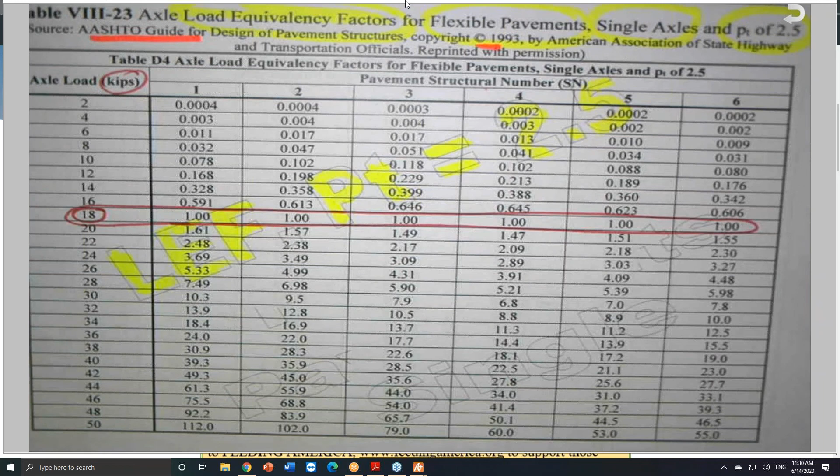After that, this factor is less than 1, and this factor is greater than 1. When loads are below 18 kips, the factors decrease; when I go above that, the factors increase. The purpose of the AASHTO effort is to convert the loads, because this pavement has different loads - a truck weighing 60,000 pounds, another 40,000, another 80,000. So we need to convert all loads into one kind, called equivalent single axle load, equivalent to 18,000 pounds or 18 kips. So this is the basis, 18 kips.

And convert all the loads into one kind, called ESALs - how many millions - and we use this to determine the number of layers and the thickness of each layer.

Keep in mind I need to know the reaction from the soil, because the soil has to be strong to resist this. I don't want to put the load, have it transfer to the pavement and soil, and the soil collapses - we did nothing. Or maybe the soil is good, but the number of layers isn't enough, or the layer strengths aren't enough, and you'll find the tire sinks into the pavement.

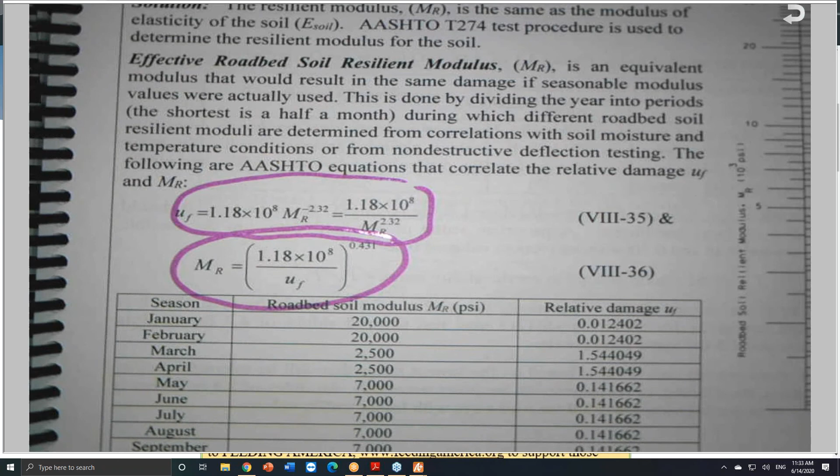In the previous NCEES pavement book, I believe I still have it somewhere here, because they release it from time to time. So I buy all the books, including the previous ones - let me see if I still have it here.

Oh yeah, transportation. This was the previous one. Civil transportation, the NCEES. If I remember correctly, they used to have a problem. Let me see if I remember correctly, because sometimes I assume something and it turns out my assumption is not correct. Yeah, here it is. Problem number 540, the last problem of the previous book. He gave you the M sub R. They are using lowercase r, that's fine, I have no problem, I use uppercase R. And this is the U sub F, the relative damage.

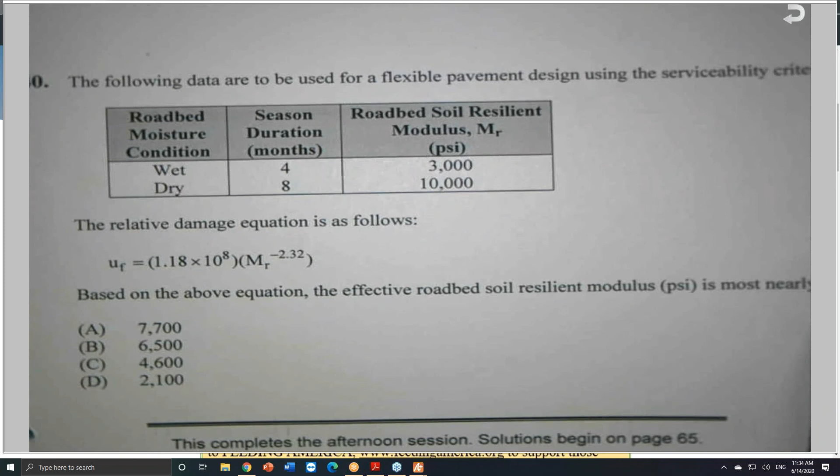In order to determine what is the resilience, the soil resilience modulus, this is a problem by itself, to get just only, because we have a wet and a dry. This might be a problem, I don't know, I'm just telling you that I don't know. It didn't show up in the second printing of the book, but they might go back again to include it, and it did happen before. I cannot really tell you what will be on the exam. If I know that, I will be a millionaire, by the way.

But unfortunately, I don't, so I don't know what will be on the next exam. So I'm doing all my best to prepare you with all the information and the knowledge I know, and I hope that I'm shooting in the right direction. I hope so, because I don't like you to come back and say, oh my God, Dr. Mansour gave me the bad information, or not the right information, or insufficient. I'm doing all my best. I cannot guarantee anything, but I'm doing all my best. So the point is...

The LEF, going back to the LEF, and I will tell you why they came up with 18 tables. Okay, so, and this is the last thing that I would like to say because I have to leave in about 10 minutes, or 15 at the most.

So the LEF, load equivalency factor, or factors, in fact we have a set of tables for the HMA and a set of tables for the PCC. This is for the rigid, and this is for the flexible. And we need to know how to use these tables because you might see a problem related to the LEF, and we are going to solve a problem. I have a very nice set of problems.

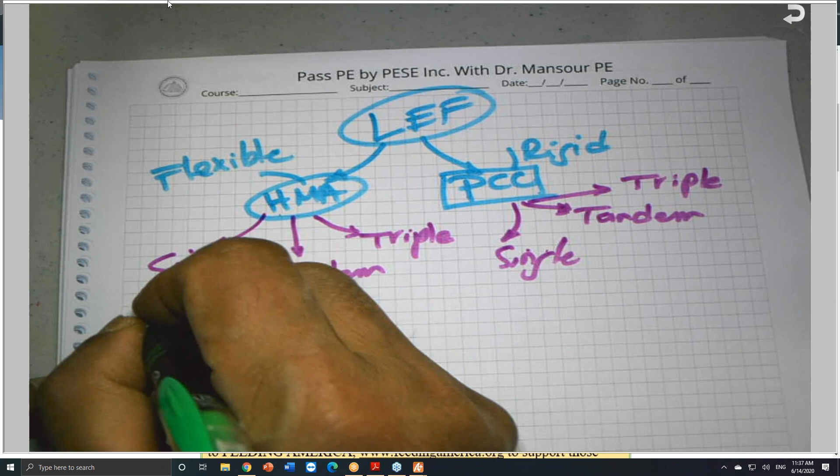And under each one of these, so those are 3 and 3, so 6. Under each one of these axles, they came up with 3 values: 2.0, 2.5, and 3.0. This value they call it P sub t. P sub t, by the way, is called terminal serviceability. Nice term they are using, terminal serviceability. We have 3 of them, they listed 3 of them: 2, 2.5, and 3.

So under single, I have 3 tables here, so 3 and 3 is 6, and plus 3 is 9. 9 times 2, because we have here and here, the same thing here by the way. This for single, they have also 2.0, 2.5, and 3.0, and the same story here, and here, and here. So under each type of axle, we have 3 terminal serviceability values.

And this is how they ended with 18 tables, from D1. If you remember, I showed you D1 all the way to D18, I have all the 18 tables. They are reproduced, and I put it in the form of rows and columns like this to avoid issues in their original document - it's a little bit, it might be... you are very welcome to use anything you want, it's your decision. But Appendix D, this is the original tables like this.

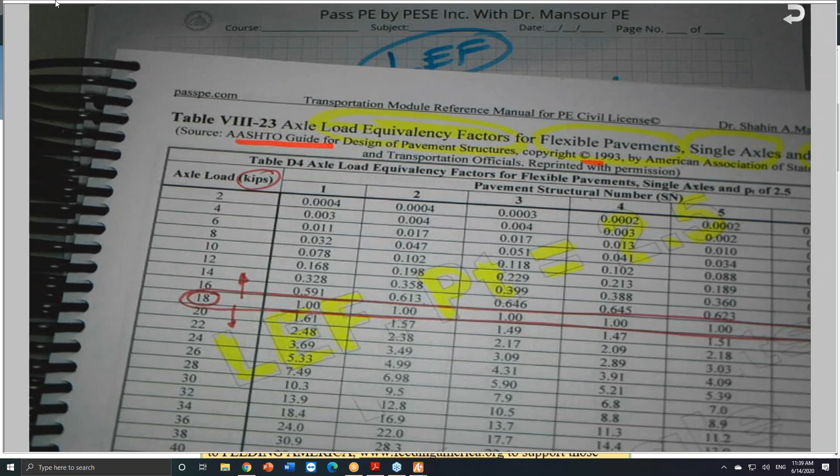So unless you do have a straight edge, you can make sure that you go up and down based on the load, axle load, so make sure that you don't pick wrong. So I put it in this form - if this is acceptable to you, that's fine, if not, if you like to use the original, I have no problem. So, I used to have all the 18 tables in the book. Right now, I still have them, but they are not in this current edition.

In the previous editions, I put 2, 2.5, and 3, so I kept only 2.5, but I will be glad to send you the 18 tables if you are interested too, because we need to know how to use this.

They ask you to calculate the ESAL, the equivalent single axle load, as we're going to see next time. If we are able to get the ESAL, we are going to move to the design after determining the properties of the soil, and we calculate the loads. So it is our job right now to determine how many layers, and we are going to go through a design like this. This is the native soil, which is the subgrade, and knowing the properties of the subgrade and the load, the ESAL,

in this case, we can determine how many layers I need: the sub base and base material, and the last layer, which is either the asphalt or the PCC, whatever it is. Normally it is asphalt, but whatever the last layer is, it's normally the most expensive layer.

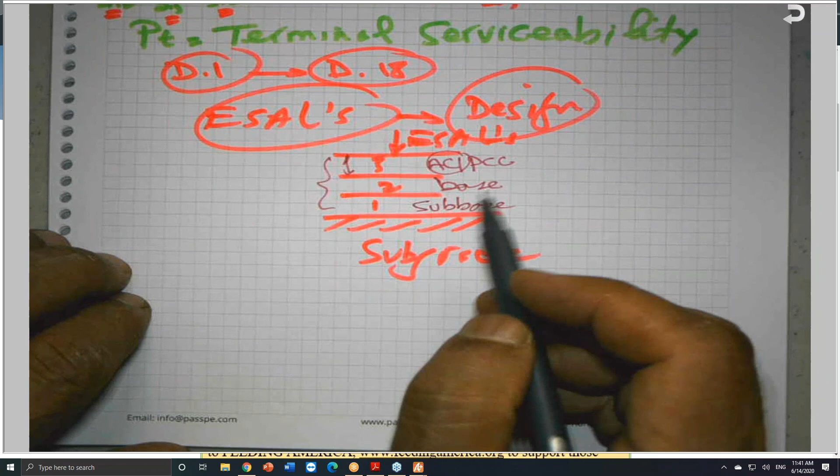And as I told you, design has alternatives. You can have one layer, two layers, three layers, and everything has a price. It's just a matter of the price, how much money are you willing to pay to have a pavement, and how much time do you have during the construction. So there are many variables that affect the selection of the type and number of layers, but we should know how to do that.

I will show you all this based on the AASHTO and the AI. There are two important ones: AASHTO, the American Association of State Highway and Transportation Officials, and the AI, the Asphalt Institute. As you remember, among the 12 references, six of them are from AASHTO.

Let me see if I have it here. Yeah, here it is. It's called the Asphalt Handbook, this is the 7th edition, which is one of the 12, the MS-4 for the Asphalt Institute. They came up with this document to help us design the asphalt, and a lot of things.

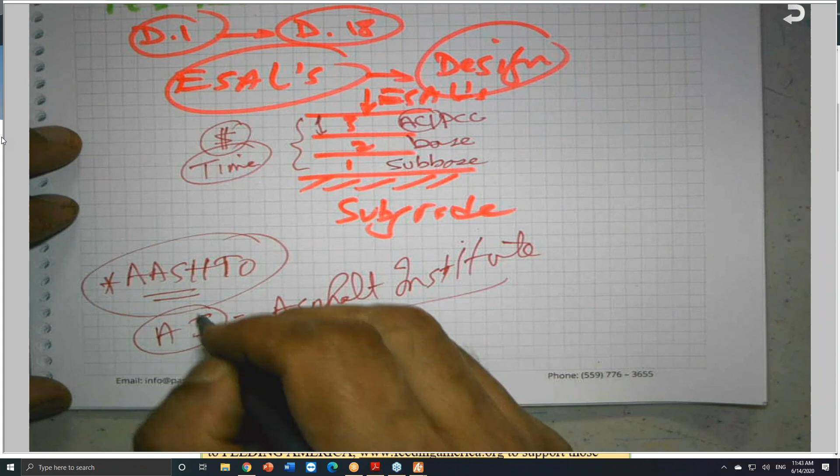Anyhow, I will do my best to provide you whatever information I have, or included in my books, from the Asphalt Institute and the AASHTO. The AASHTO has two books related to pavement, by the way: the green one I showed you, and another one also green, called Mechanistic Pavement Design. I summarize as much as I can in my books related to all these books.